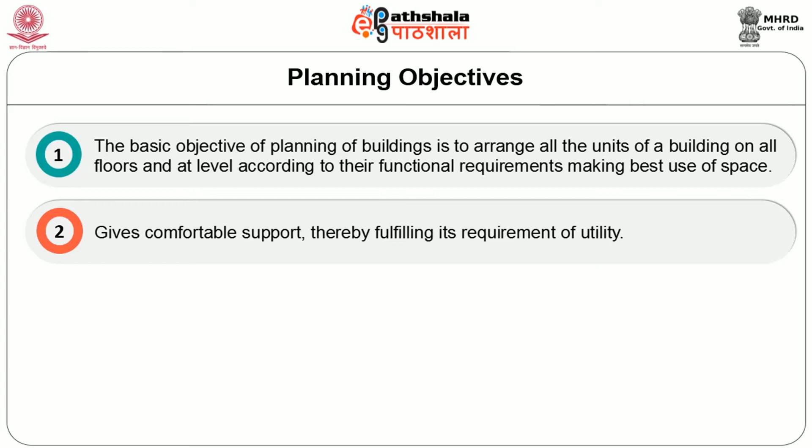The basic objective of planning a building is to arrange all the units of the building on all the floors and at level according to their functional requirement, and make the best use of space. The second one is it gives comfortable support, thereby fulfilling its requirement of utility. The third one is it gives pleasure when seen or touched if it is beautiful. Then the final one is it suits the individual or group if it has character.

Next we will see the factors influencing the life space. In order to understand personality and culture in relation to a particular group of individuals, we generally list a number of factors. Some of them are climate, location, mobility, people, lifestyle, psychology, taste, and financial limit.

The first one is climate. A house can be designed and constructed to maximize or minimize the effect of climate. It is possible to create an atmosphere of warmth or cold, snugness or airiness. The thick rug and the comfortable built-in seating contribute to the sense of snugness. The fireplace too plays a role in keeping the occupants warm. Windows can be oriented to collect warmth or provide ventilation. Floor and wall materials can be selected to store natural solar heat or to insulate against cold.

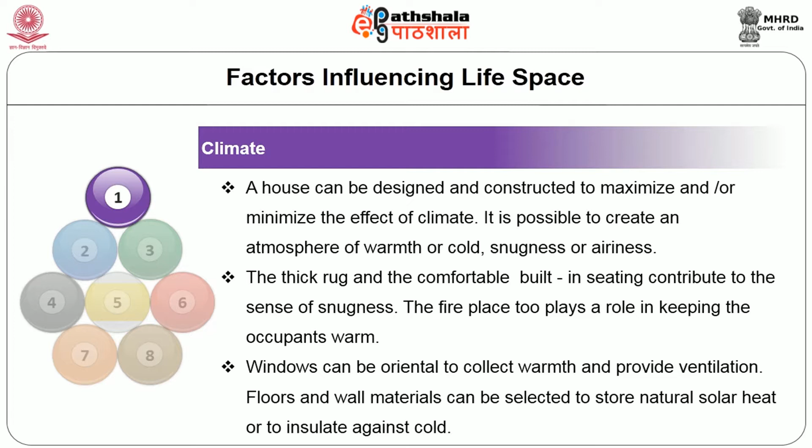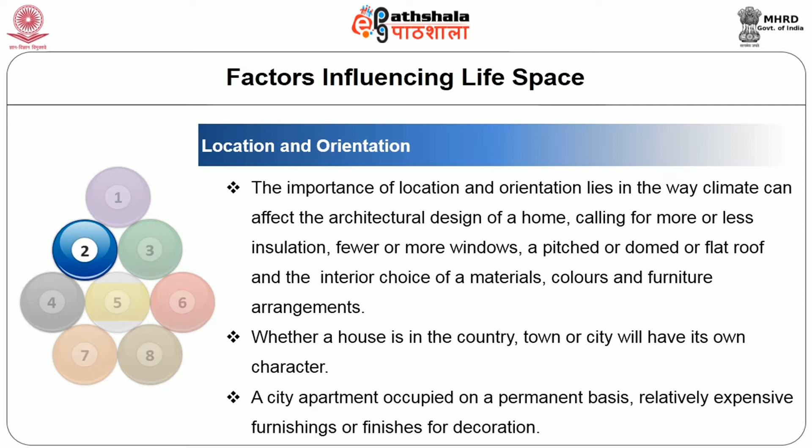Then we will see the second factor, location and orientation. The importance of location and orientation lies in the way climate can affect the architectural design of the home, calling for more or less insulation, fewer or more windows, a pitched, domed or flat roof, and the interior choice of materials, colors and furniture arrangements. Whether the house is in the country, town or city, it will have its own character. A city apartment occupied on a permanent basis has relatively expensive furnishings or finishes for decoration.

The next important factor is mobility. Mobility means movement of the population from one place to another, and it depends upon the nature of work. One may have to transfer in his job every five years. In these cases, they should do careful planning for the house. For example, possess lightweight furniture and repair the worn-out items before leaving for the tenant.

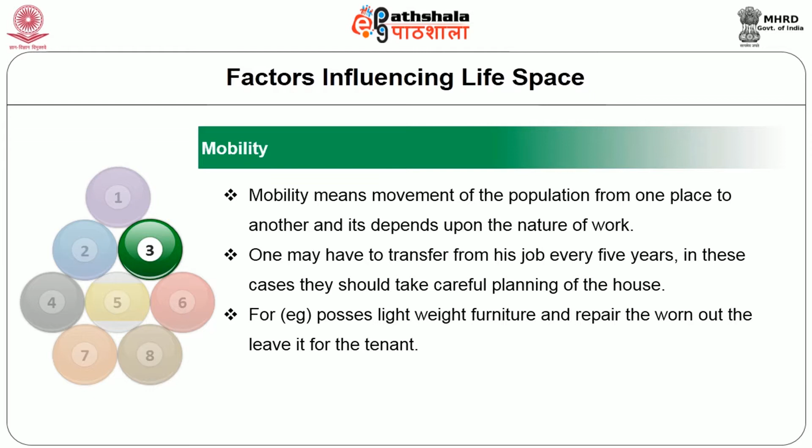Then the next one is people. The people who live in the home are the most important planning factor. The number, ages, sex, size, activities and relationships of the people who comprise the household must be the primary factor, in order to meet the special needs and interests of each individual.

The next factor is lifestyle. Lifestyle is the amount of time devoted to various activities in the home. It includes entertainment habits, large or small, formal or informal gatherings of friends or relatives, types of social activities such as meals, music, games, and the location of these activities within the home. The well-planned space will provide for whichever of these variables dominates the lifestyle.

Then psychology. Psychologist Robert Sommer has studied the effect of the physical environment upon the attitudes and behavior of the people who use it. A space should contribute positively to the comfort and efficiency of the inmates. Often people have the psychological effects of claustrophobia and agoraphobia. People who have the fear of enclosed space have claustrophobia. Claustrophobic people feel great anxiety in small rooms. They always like open spaces.

People who have the fear of open space have agoraphobia. In the absence of walls and other comforting fixtures, the agoraphobic experiences a feeling of insecurity. They always like enclosed space. Such factors need consideration in planning the life space for many people. The next factor is taste. Taste is defined as the particular likes and dislikes of an individual. It is familiar to us from everyday experiences.

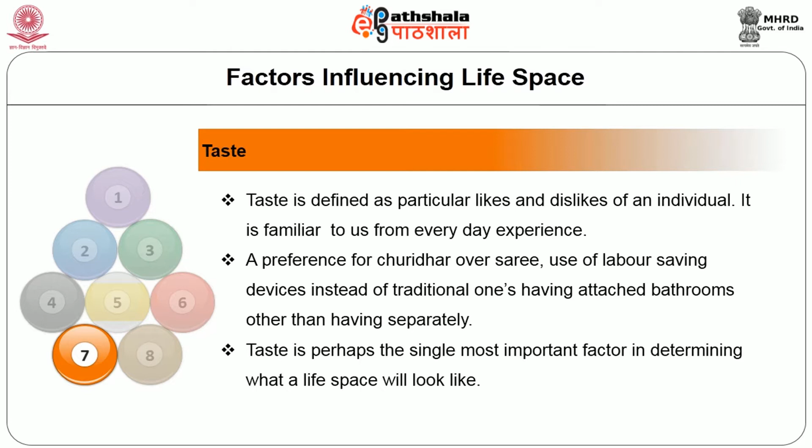A preference for churidar over sari, use of labor-saving devices instead of traditional ones, having attached bathrooms rather than having them separately. Taste is perhaps the single most important factor in determining what your life space will look like. The final factor is financial limits.

Both human and financial resources should be taken into account while planning the house. The present position can help to decide this factor. The individual skills, hobbies and creative abilities should also be taken into consideration. Materials should be selected to provide a balance between care required and aesthetic qualities desired. The next topic is principles of planning the house.

Architects often use the word plan to mean the horizontal representation of area, which is commonly known as floor plan. Such plans usually show walls as thick lines, windows as thin lines, and doors as a blank space. A complete plan should show the direction in which doors swing and also the location of the electrical outlets. As a general rule, the shape of the plan is governed by the climatic condition of the place, whether compact or closed, or extended or open.

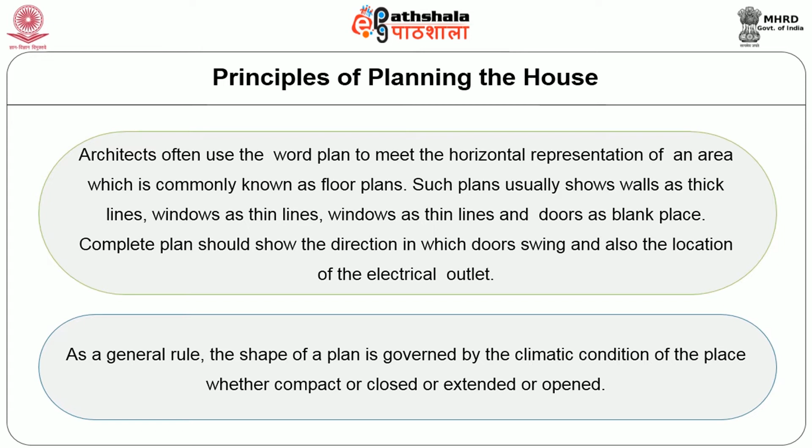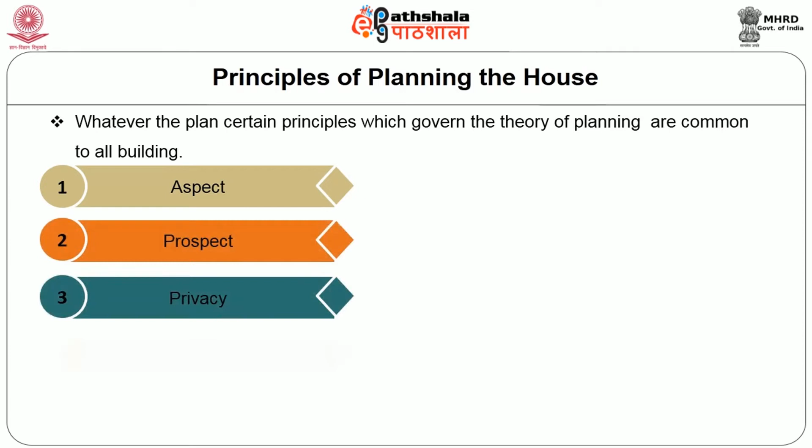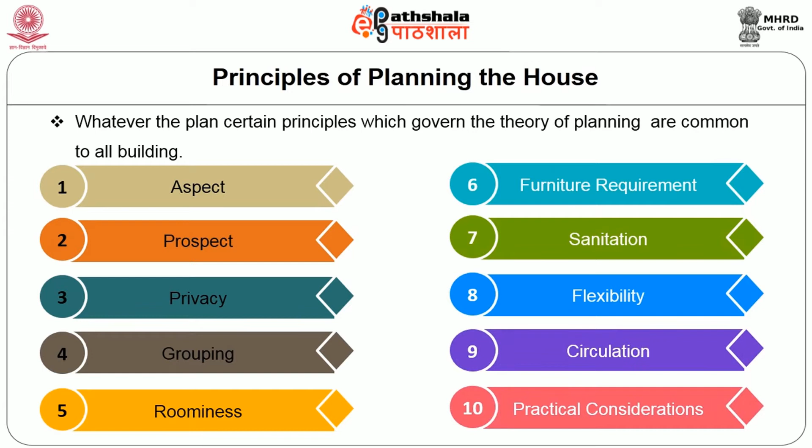Whatever the plan, certain principles which govern the theory of planning are common to all buildings. These principles are aspect, prospect, privacy, grouping, roominess, furniture requirement, sanitation, flexibility, circulation and practical consideration. First we will discuss the principle of aspect.

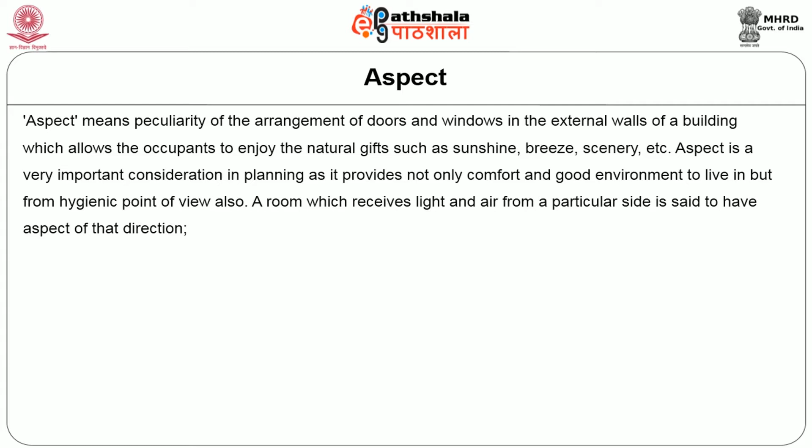Aspect means the peculiarity of the arrangement of doors and windows in the external walls of the building, which allows the occupant to enjoy natural gifts such as sunshine, breeze, scenery, etc. Aspect is a very important consideration in planning, as it provides not only comfort and a good environment to live in, but is important from a hygienic point of view also. A room which receives light and air from a particular side is said to have the aspect of that direction. From this angle, the following aspects for different rooms are preferred.

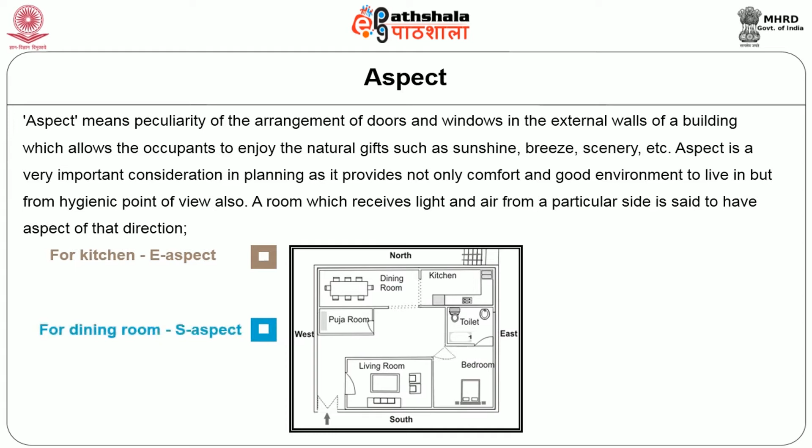For kitchen, east aspect. For dining room, south aspect. For drawing and living room, south aspect or southeast aspect. For bedroom, southwest aspect or west aspect. For veranda, southwest aspect or west aspect. For reading room, stores, classrooms, studios, stairs, etc., north aspect.

It is clear that a kitchen should have an east aspect so that the morning sun would refresh and purify the air and keep the kitchen cool during the remaining period of the day. A dining or drawing and living room should have a south aspect or southeast aspect. The sun is towards the south during winter and more deviated towards the north during summer.

Similarly, the bedroom should have a west aspect or southwest aspect, since the breeze required in summer comes predominantly from the west side only. But a veranda, a gallery or some such sun shading device must be provided on that side so as to protect the structure from the hot afternoon sun. Hence, reading rooms, stores, stairs, studios, classrooms, etc. are placed towards the north.

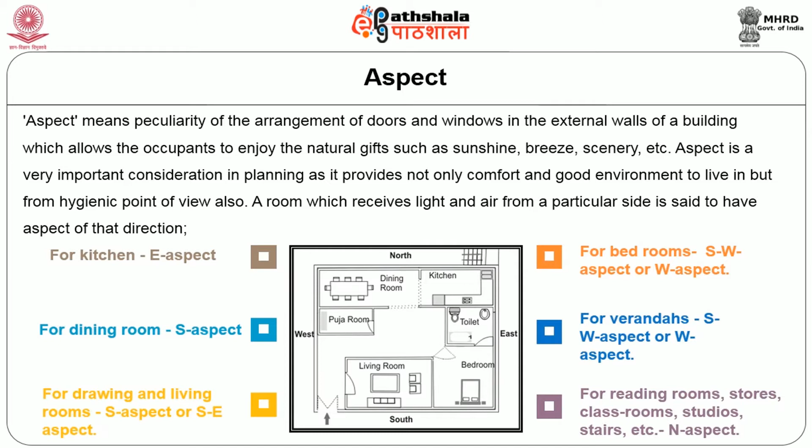The second most important principle of planning the house is prospect. Prospect is the impression that the house is likely to make on a person who looks at it from the outside. Therefore, it includes the attainment of a pleasing appearance by the use of natural beauties, disposition of doors and windows, and concealment of some undesirable views in a given outlook. Prospect and aspect both demand disposition of doors and windows.

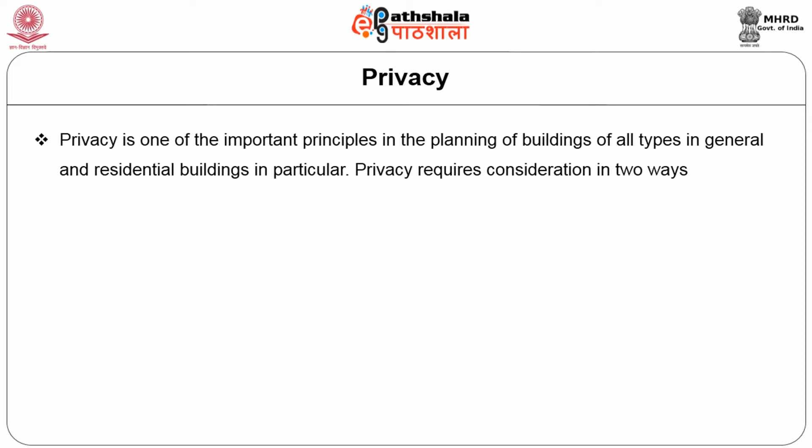The third most important principle of planning the house is privacy. Privacy is one of the most important principles in the planning of buildings of all types in general and residential buildings in particular. Privacy requires consideration in two ways. The first one is privacy of one room from another. The second one is privacy of all parts of the building from neighboring buildings, public streets and byways.

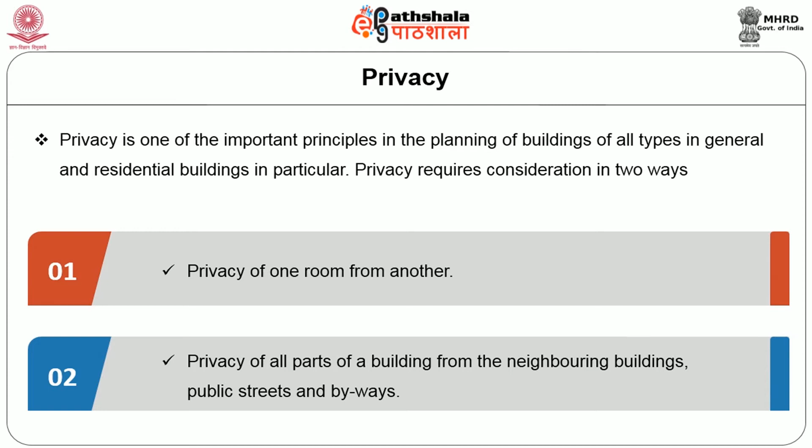Privacy of the former type is attained by carefully planning the building with respect to grouping or disposition of doors or mode of hanging doors, provision of a small corridor or lobby, etc. This can also be achieved by planning screens and curtains. Privacy of the latter type is easily secured by carefully planning the entrance and screening it with trees or creepers trained on a trellis. Privacy is of supreme importance in bedrooms, water closets, urinals, bathrooms, etc. The fourth principle is grouping.

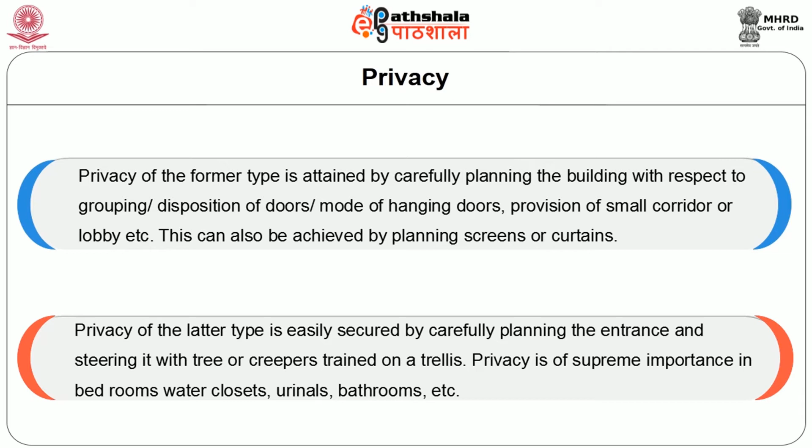Grouping means the disposition of various rooms in related positions so that all the rooms are placed in the proper correlation of their functions and in proximity with each other. For example, in a residential building, the dining room must be close to the kitchen. At the same time, the kitchen should be away from the drawing or the main living room. Otherwise, kitchen smells and smoke would be distracting.

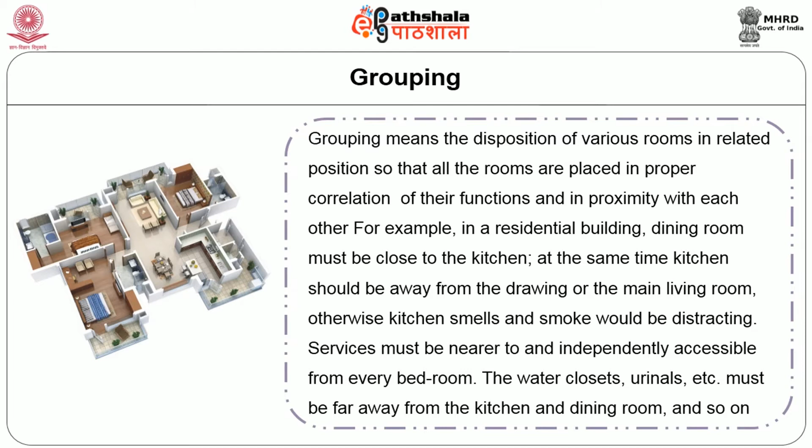Services must be nearer to and independently accessible from every bedroom. The water closet, urinals, etc. must be far away from the kitchen and dining room, and so on.

The fifth principle is roominess. Roominess refers to the effect produced by deriving the maximum benefit from the minimum dimensions of the room. It is the accomplishment of economy of space while at the same time avoiding cramping of the plan. It is essential, particularly in the case of residential buildings where large storage space is required, to make maximum use of every nook and corner of the built-up area of the building before making an addition to the plinth area.

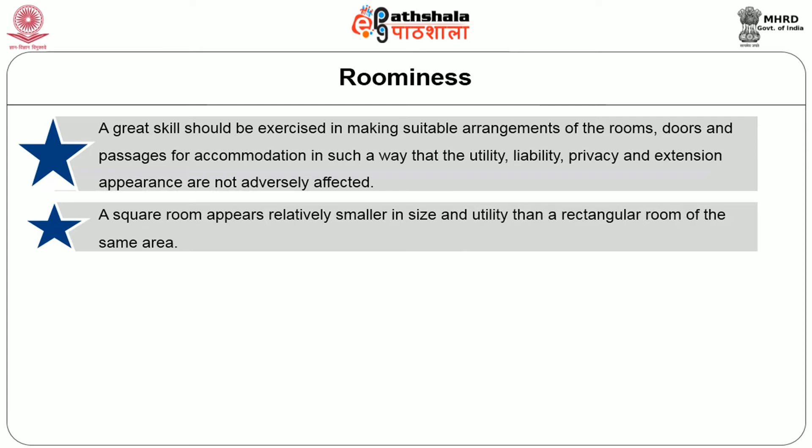For giving a better impression of roominess, the following points should be kept in view. A great skill should be exercised in making suitable arrangements of the rooms, doors and passages for accommodation in such a way that the utility, livability, privacy and external appearance are not adversely affected. A square room appears relatively smaller in size and utility than a rectangular room of the same area. A small room with inordinately high walls appears relatively smaller than its actual size.

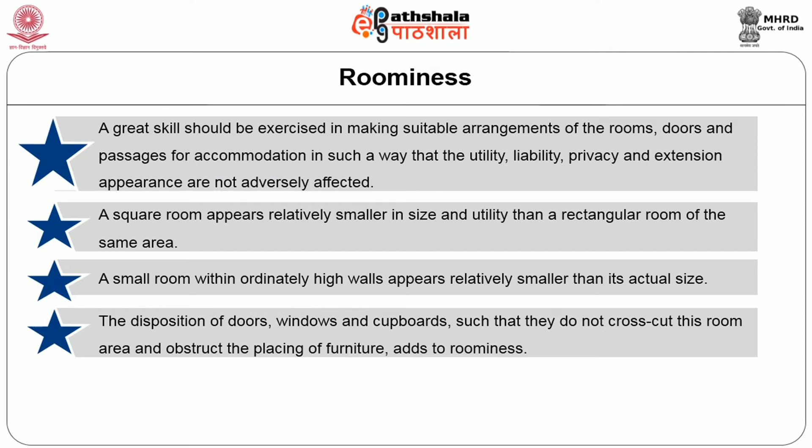The disposition of doors, windows and cupboards such that they do not cross-cut the room area and obstruct the placing of furniture adds to roominess. The design of elements such as floors, walls, ceilings, lift, etc. should be such as to create a sense of space beyond its actual dimensions.

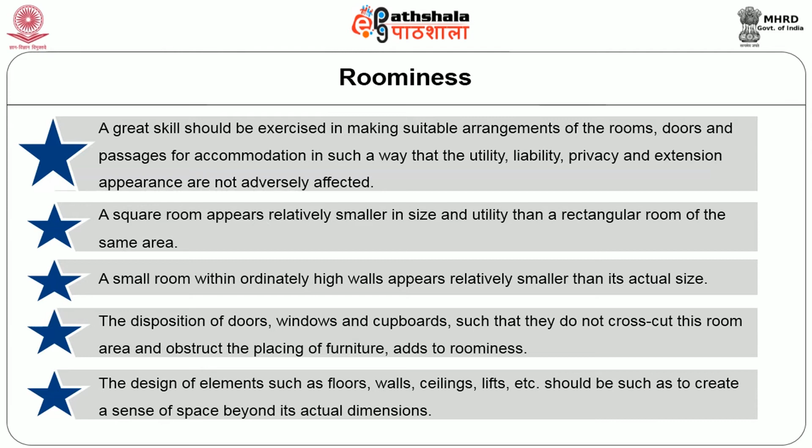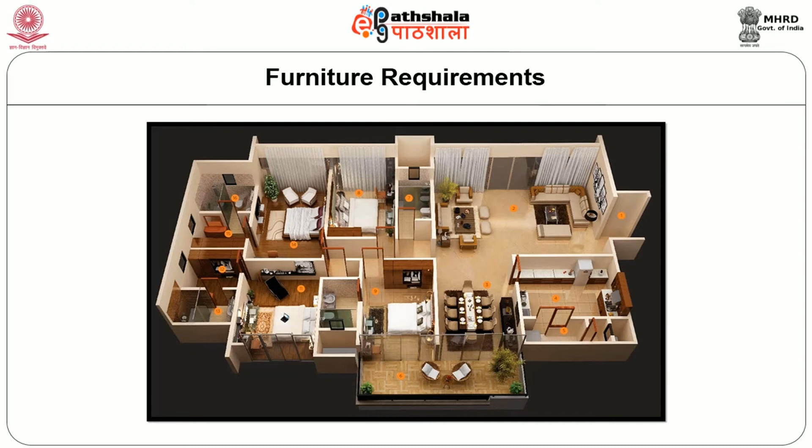The next principle is furniture requirement. The functional requirement of the room or an apartment governs the furniture requirements. This is an important consideration in planning of buildings. In a residential building, for a room, whether intended for a bedroom or kitchen or drawing room, the architect should take into account the position of all types of furniture likely to be accommodated so that the doors, windows and circulation space do not prevent placing of a sufficient number of furniture pieces.

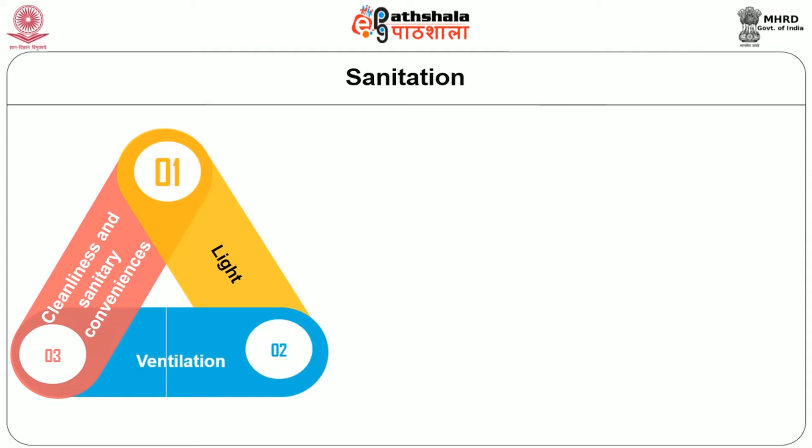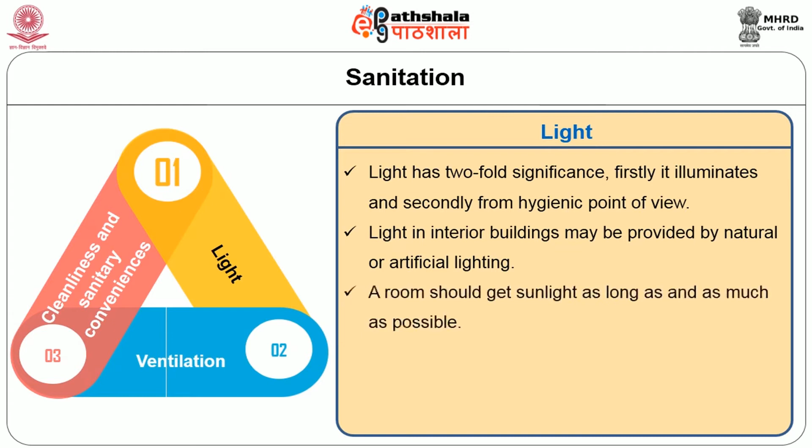Sanitation. Sanitation consists of providing ample light, ventilation, facilities for cleaning and sanitary convenience in the following manner. First is light. Light has twofold significance: firstly, illumination, and secondly, from the hygienic point of view. Light in interior buildings may be provided by natural or artificial lighting. A room should get sunlight as long as and as much as possible. Vertical windows are therefore better than horizontal ones.

Next is ventilation. It is the supply of outside air, either by positive ventilation or by infiltration into the building. Good ventilation is an important factor conducive to comfort in buildings. Poor ventilation or lack of fresh air in a building always produces headache, sleepiness, inability to fix attention, etc. Ventilation may be natural or mechanical. In natural ventilation, the outside air is supplied into the building through windows, ventilators and other openings.

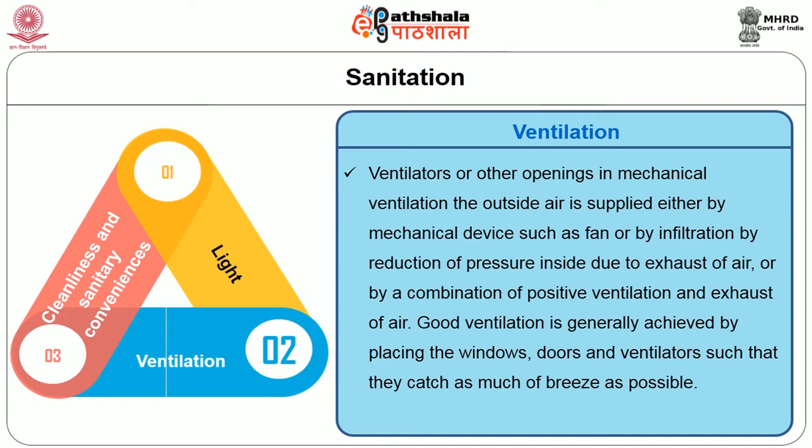In mechanical ventilation, the outside air is supplied either by mechanical devices such as fans, or by infiltration by reduction of pressure inside due to exhaust of air, or by a combination of positive ventilation and exhaust of air. Good ventilation is generally achieved by placing the windows, doors and ventilators such that they catch as much of the breeze as possible.

Cleanliness and sanitary convenience. Though the general cleaning and upkeep of the building is the responsibility of the occupants, even then some provisions to facilitate cleaning and prevention of dust are necessary in planning. The floors as far as possible should have a non-absorbent, smooth surface, and proper slope should be given to facilitate washing, with suitable outlets in the walls.

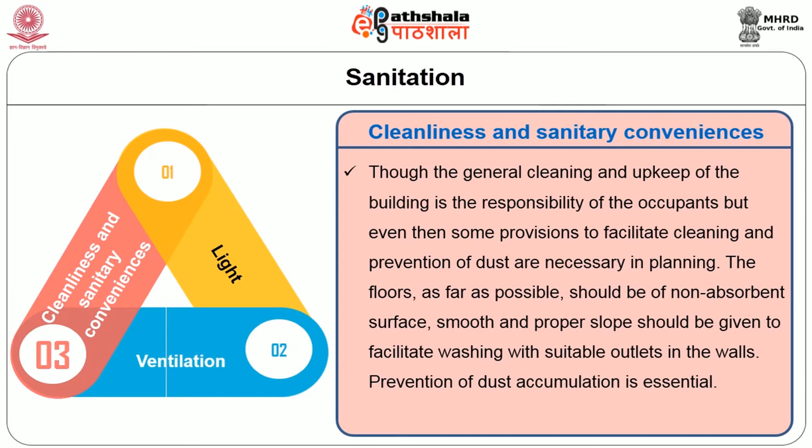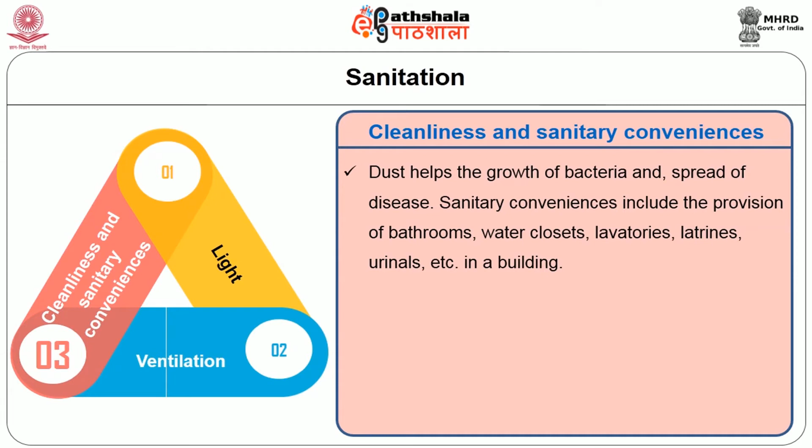Prevention of dust accumulation is essential. Dust helps the growth of bacteria and spread of diseases. Sanitary conveniences include provision of bathrooms, water closets, lavatories, latrines, urinals, etc. in the building.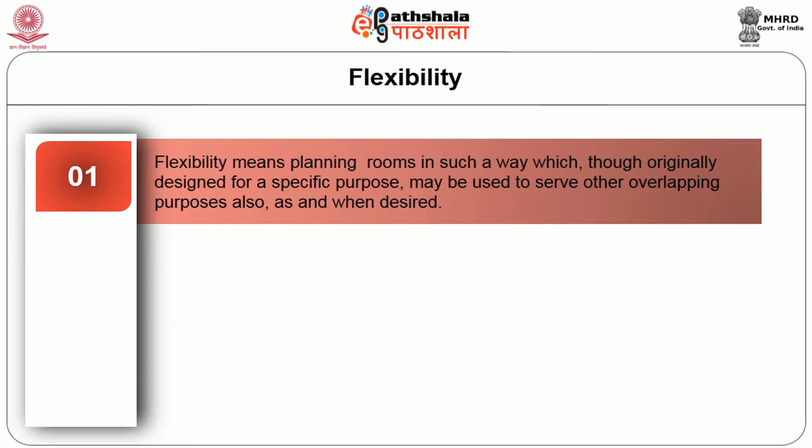The next is flexibility. Flexibility means planning rooms in such a way that, though originally designed for a specific purpose, they may be used to serve other overlapping purposes also as and when desired. This is particularly important for designing houses for middle class families. A house planned on scientific principles within a small space must provide for various activities such as listening to the radio, children's homework, entertaining guests, and festive occasions such as holiday dinners, birthday parties, wedding banquets, and so on.

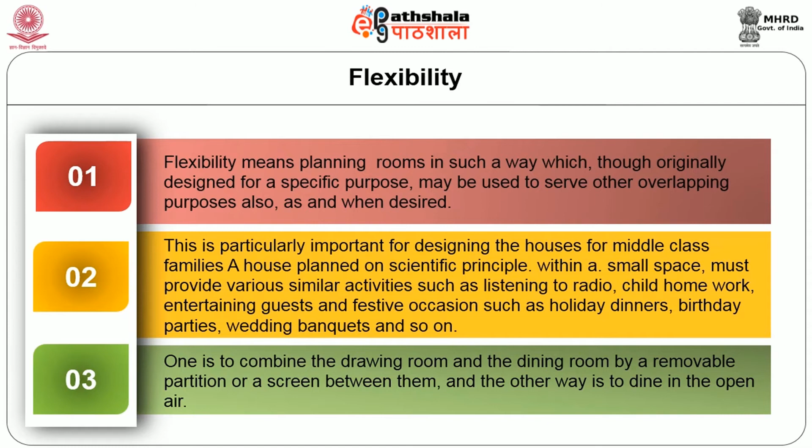One way is to combine the drawing room and the dining room by a removable partition or a screen between them, and the other way is to dine in the open air. Next principle is circulation.

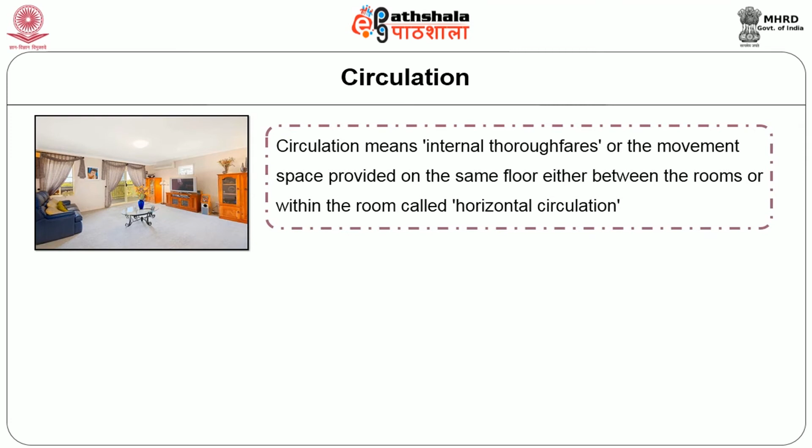Circulation means internal thoroughfares or the movement space provided on the same floor, either between the rooms or within the rooms, called horizontal circulation, and between the different floors through stairs or lifts, called the vertical circulation. Passages or corridors, halls and lobbies serve the purpose of horizontal circulation, whereas for vertical circulation normally stairs or staircase, electrical lift, ramps, etc. are the means of access to different floors.

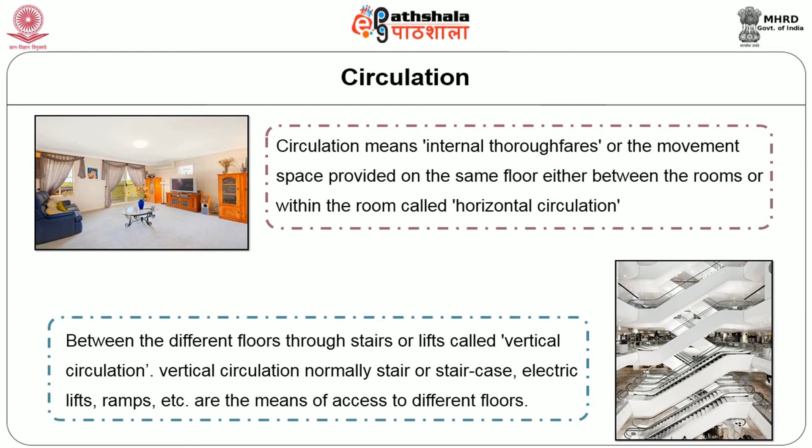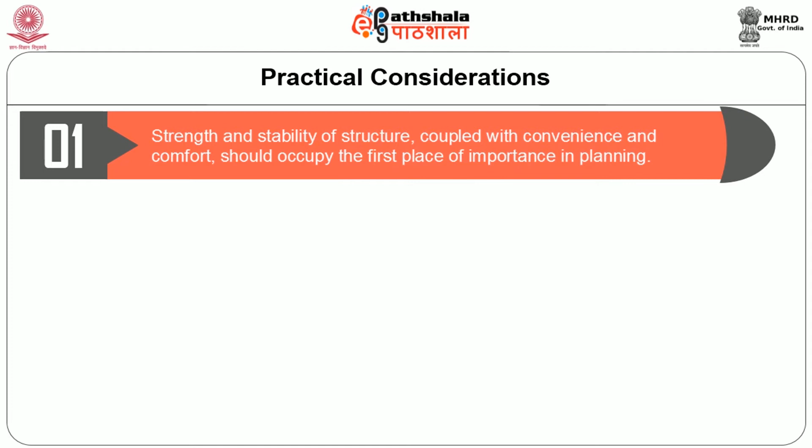Then the final principle is practical consideration. The following practical considerations should be given due consideration in the planning of a building. The first one is strength and stability of the structure coupled with convenience and comfort should occupy the first place of importance in planning. The second is simplicity and effect of strength lend a lasting beauty and nobility to the building. The third one is it should be remembered that a building or a house is immovable property and

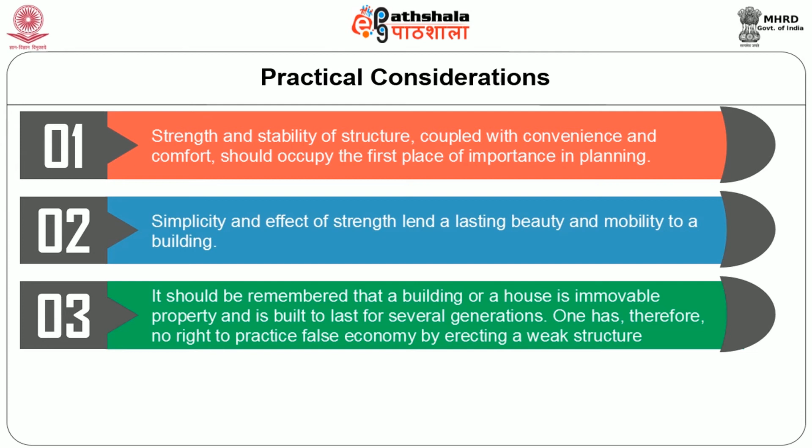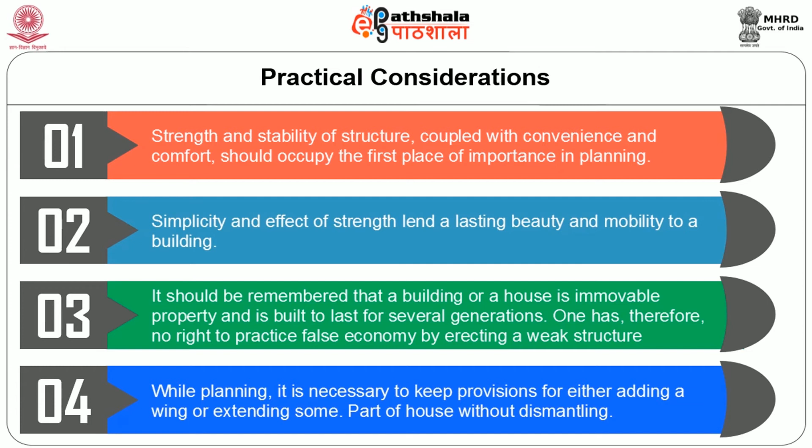is built to last for several generations. One has therefore no right to practice false economy by erecting a weak structure. And the final one is while planning it is necessary to keep provision for either adding a wing or extending some part of the house without dismantling.

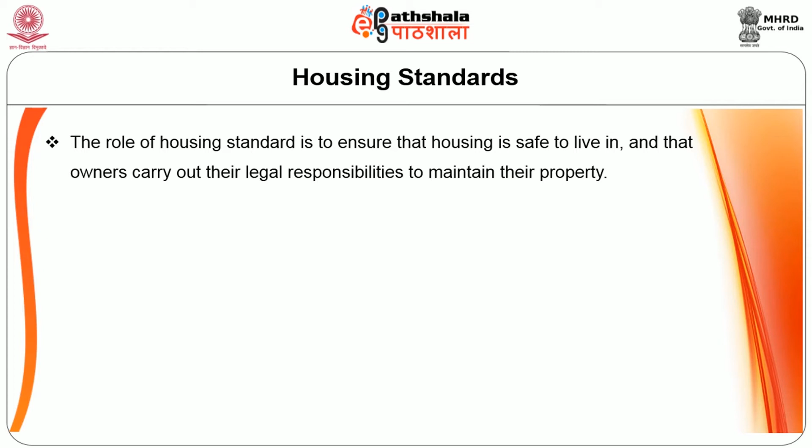So next we will discuss the housing standards. The role of housing standards is to ensure that housing is safe to live in and that owners carry out their legal responsibilities to maintain their property. The Bureau of Indian Standards is the national standard body of India established by the Bureau of Indian Standards Act 1976, formerly known as ISI.

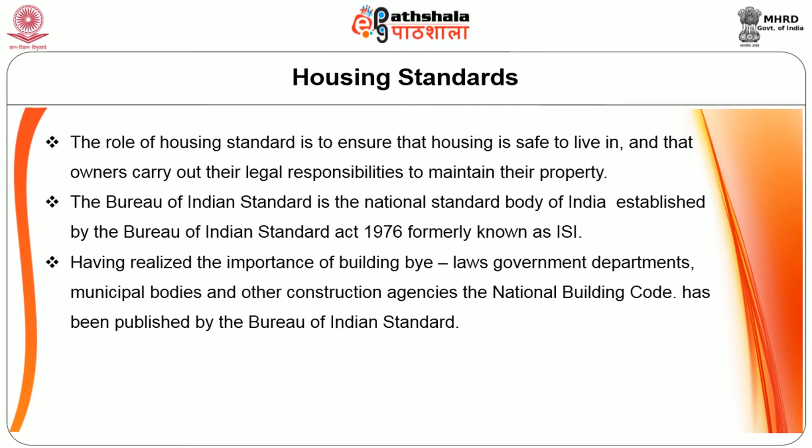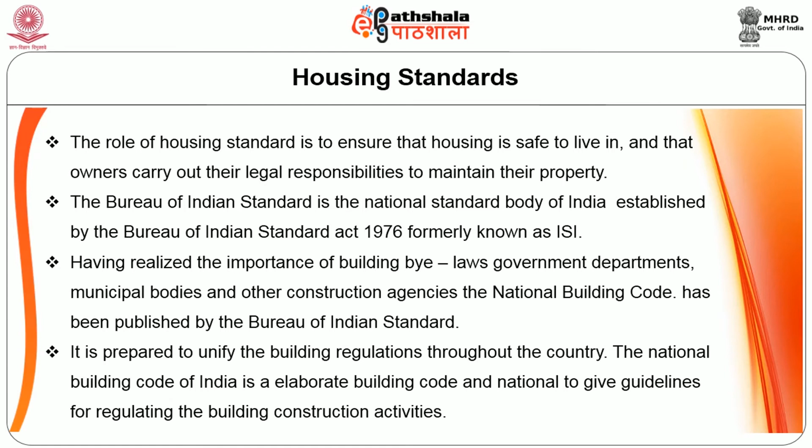Having realized the importance of building bylaws for government departments, municipal bodies and other construction agencies, the National Building Code has been published by the Bureau of Indian Standards. It is prepared to unify the building regulations throughout the country. The National Building Code of India is an elaborate building code and a national document to give guidelines for regulating the building construction activities.

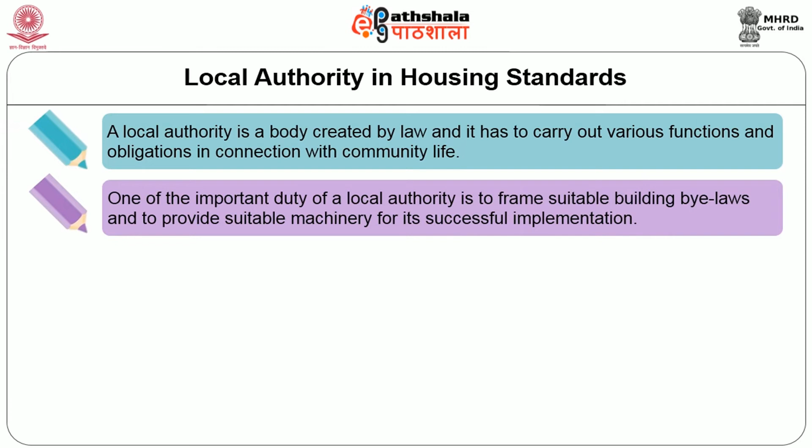Local authority in housing standards. A local authority is the body created by law and it has to carry out various functions and obligations in connection with community life. One of the important duties of the local authority is to frame suitable building bylaws and to provide suitable machinery for its successful implementation. For this purpose, it should form a department to receive the plans of proposed buildings.

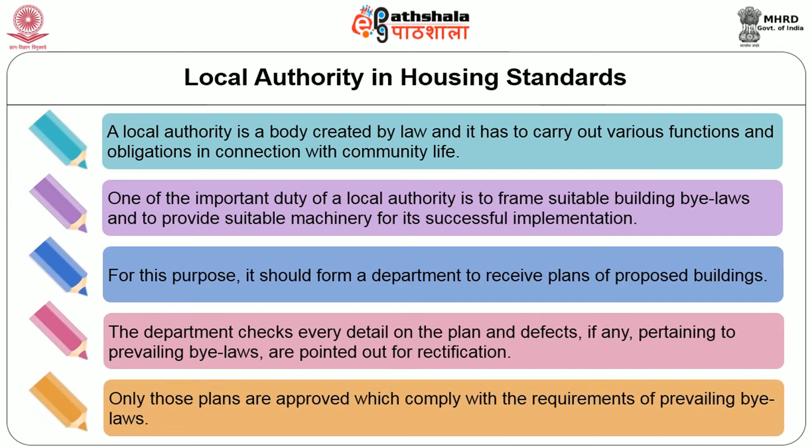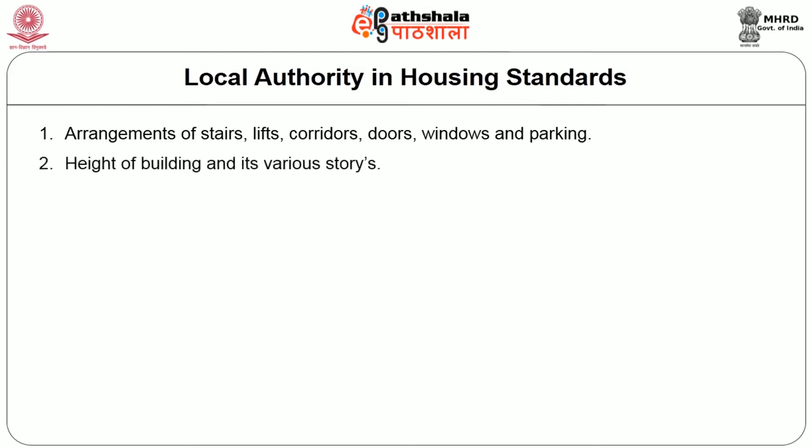The department checks every detail on the plan and defects, if any, pertaining to the prevailing bylaws are pointed out for rectification. Only those plans are approved which comply with the requirements of prevailing bylaws. The approval of a plan means the acceptance by the local authority of the following requirements only. First one is arrangement of stairs, lift, corridors, doors, windows and parking. Height of building and its various stories.

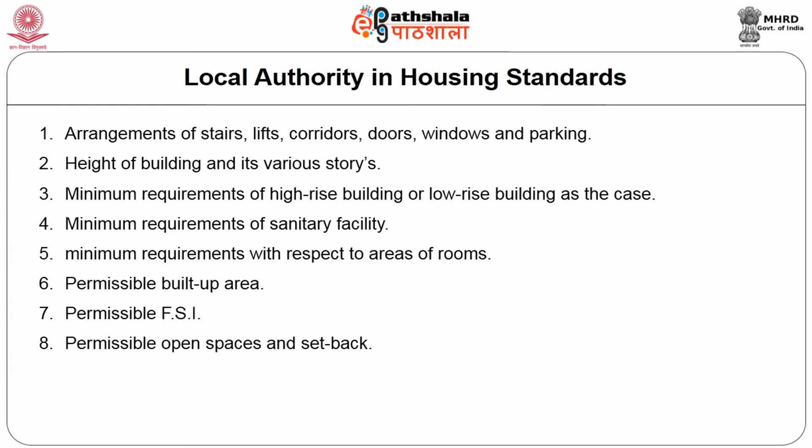Then minimum requirements of high-rise building or low-rise building as the case may be. Minimum requirements of sanitary facilities. Then minimum requirements with respect to area of rooms. Permissible built-up area, permissible FSI, permissible open space and setback, permissible use of building and provision for light and ventilation.

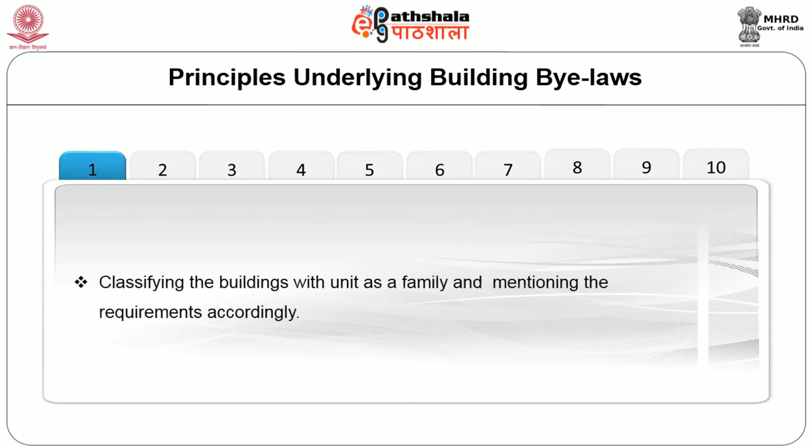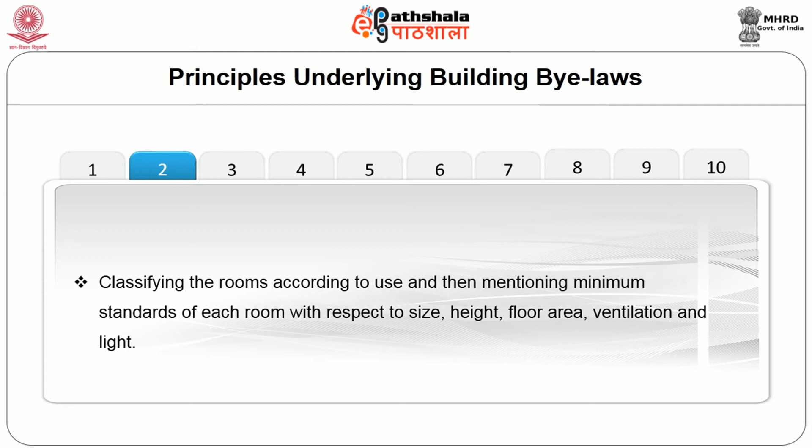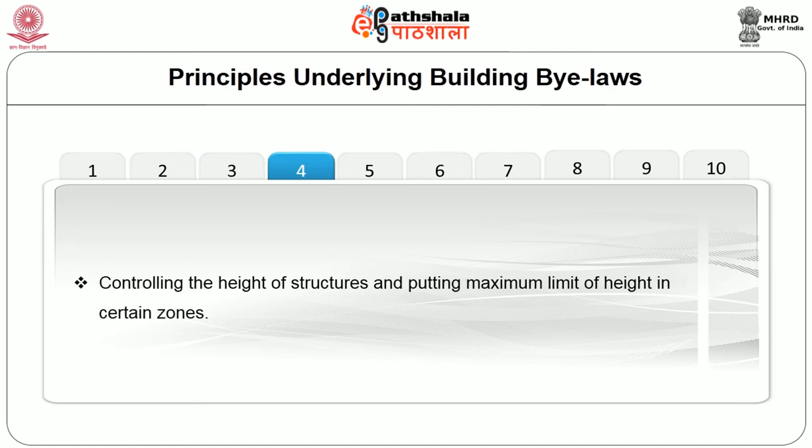Principles underlying building bylaws. The broad principles to be observed while framing the building bylaws for any locality can be summarized as follows. Classify the buildings with the unit as the family and mention the requirements accordingly. Classify the rooms according to use and then mention the minimum standard of each room with respect to size, height, floor area, ventilation and light. Controlling the height of compound wall and location of compound gates. Controlling the height of structure and putting a maximum limit of height in certain zones.

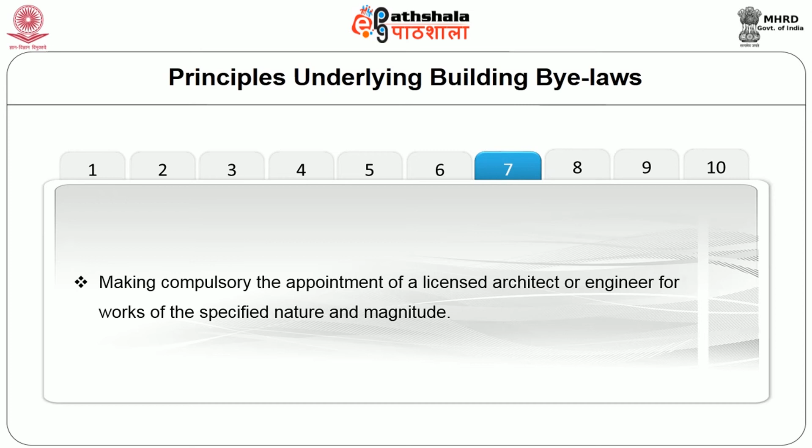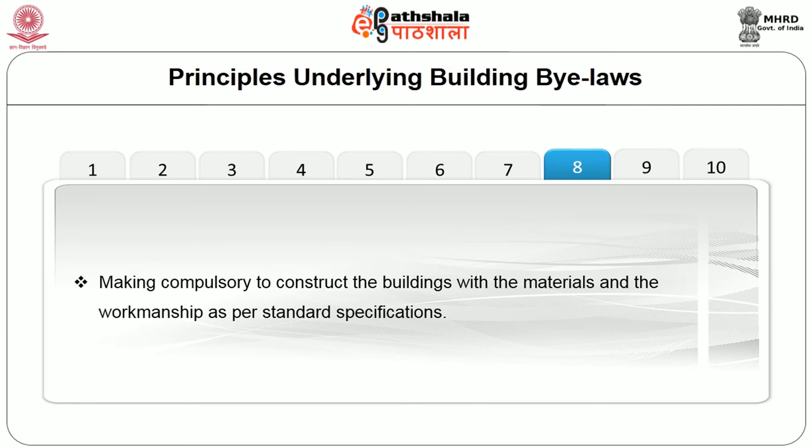Controlling the area of projections in the marginal space, insisting on suitable FSI. Insisting upon suitable arrangements with respect to drainage and water supply. Making compulsory the appointment of licensed architects or engineers for work of the specified nature and magnitude. Making it compulsory to construct the buildings with the materials and workmanship as per standard specifications. Mentioning the light planes, setbacks and marginal spaces. Mentioning the minimum size of plots, their dimensions and frontage, etc.

Building bylaws for residential areas. The brief descriptions of all the possible building bylaws to be framed for residential areas of a typical town planning scheme are mentioned below. The content and provisions may be altered to suit the local requirements. Following are the important building bylaws.

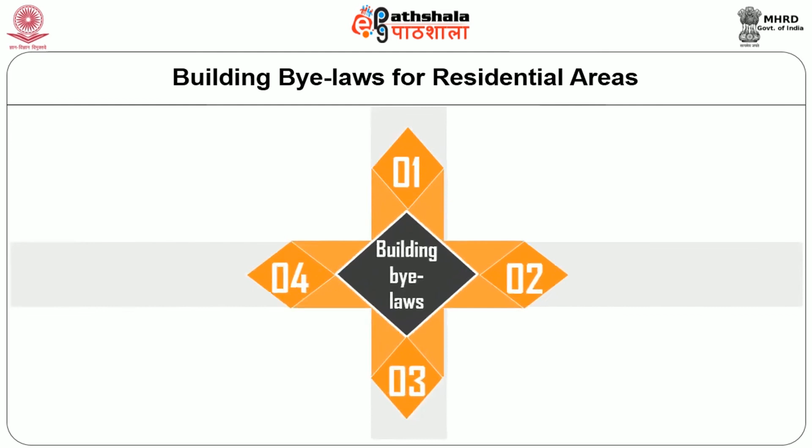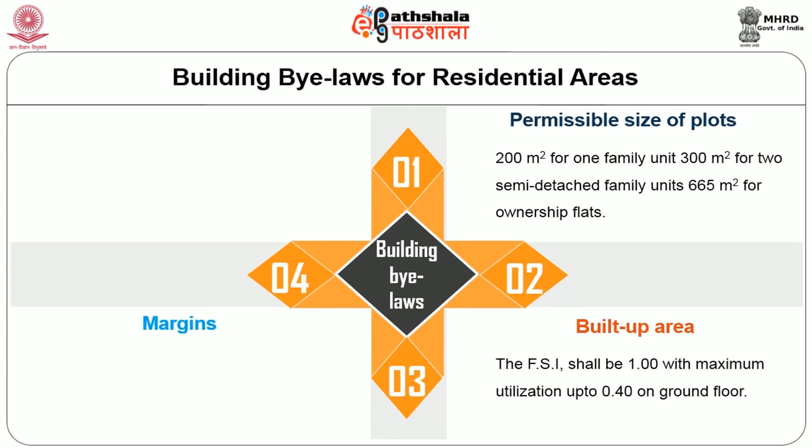Permissible size of plots: 200 meters squared for one family unit, 300 meters squared for two semi-detached family units, 665 meters squared for ownership flats. Built-up area: the FSI shall be 1, with maximum up to 0.4 on ground floor. Margins: the margins on roadside and adjacent properties shall be respectively 4.5 meter and 3 meter. For plots having areas less than 300 meters squared, they shall be respectively 3 meter and 2 meter.

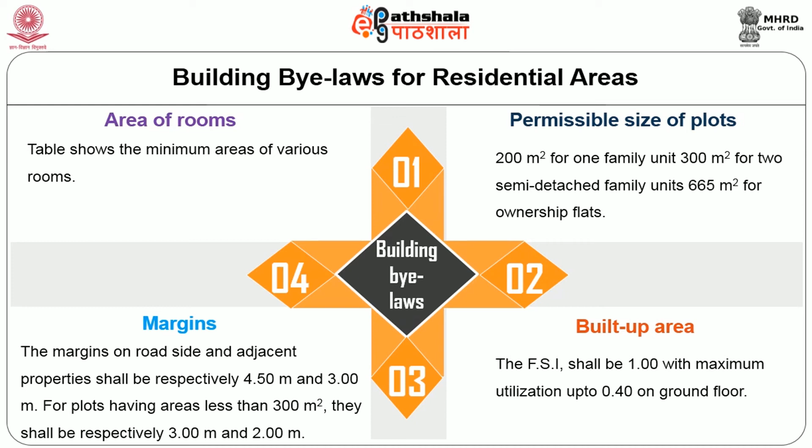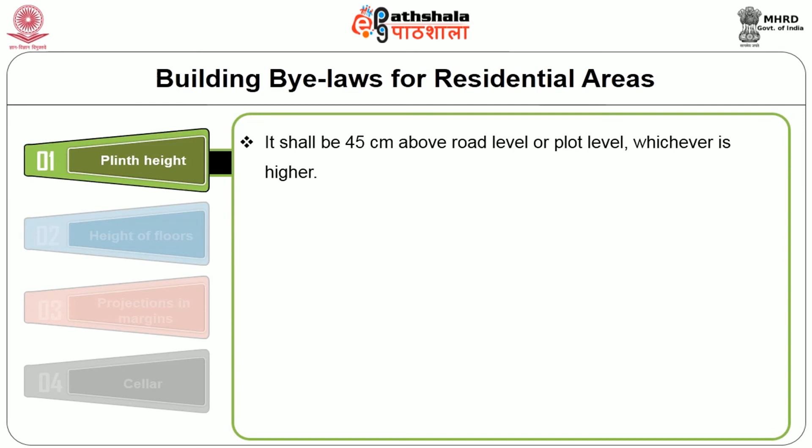Then plinth height. It shall be 45 centimeter above the road level or plot level, whichever is higher. Then height of floors. The minimum height shall be as follows: 2.1 meter for bathroom, water closet, pump room, cold room and water room; 2.7 meter floor height on each floor. The maximum height of floor shall not be more than 1.25 times the minimum height.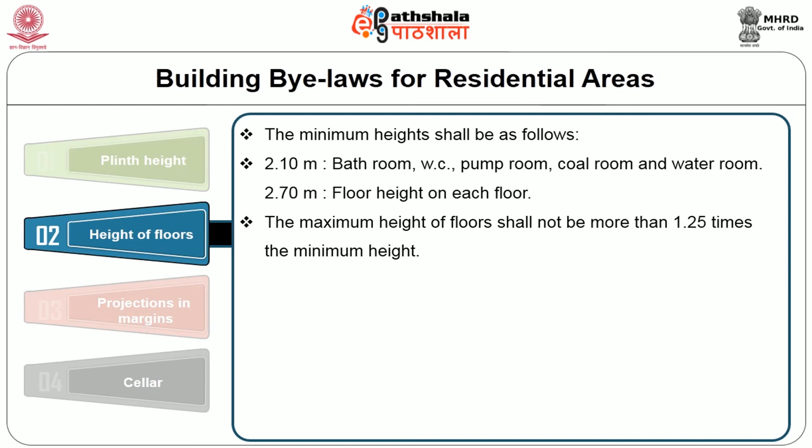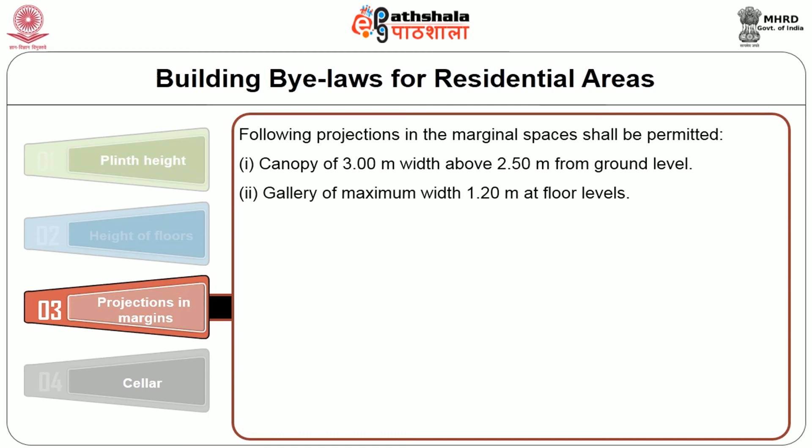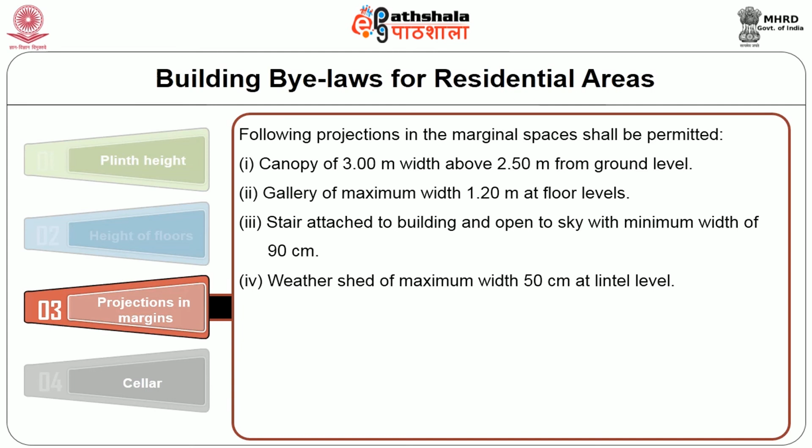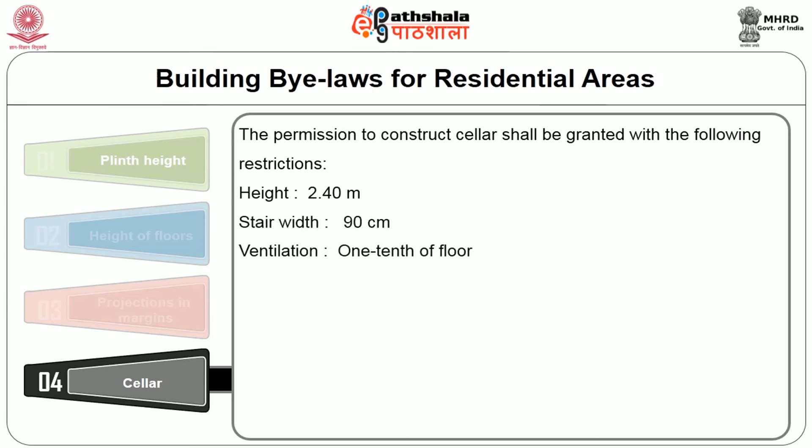Then projection in margins. The following projections in the marginal space shall be permitted: canopy of 3 meter width above 2.5 meter from ground level, gallery of maximum width 1.2 meter at floor levels, stairs attached to building and open to sky with minimum width of 90 centimeter, weather shed of maximum width 50 centimeter at lintel level. Cellar. The permission to construct a cellar shall be granted with the following restrictions: height is 2.4 meter, stair width is 90 centimeter, ventilation 1/10 of the floor.

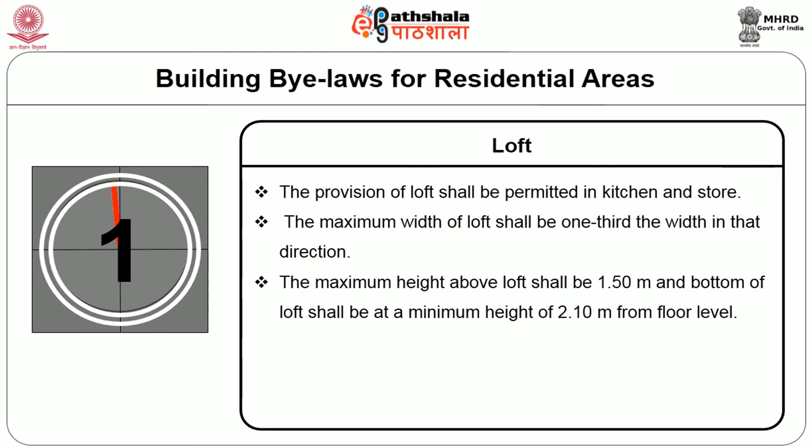Then loft. The provision of the loft shall be permitted in kitchen and storeroom. The maximum width of the loft shall be 1/3 the width in the directions. The maximum height above the loft shall be 1.5 meter and the bottom of loft shall be at a minimum height of 2.1 meter from floor level. Lift. For buildings having more than 3 floors, the lift shall be provided at the rate of 1 lift for 20 family units. The lift shall be provided from ground floor and its minimum capacity shall be 6 persons. If the height of the building is 25 meter or more, at least 2 lifts shall be provided.

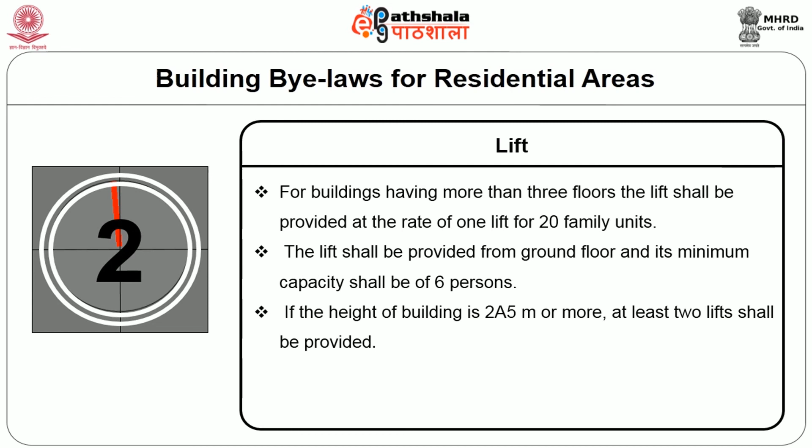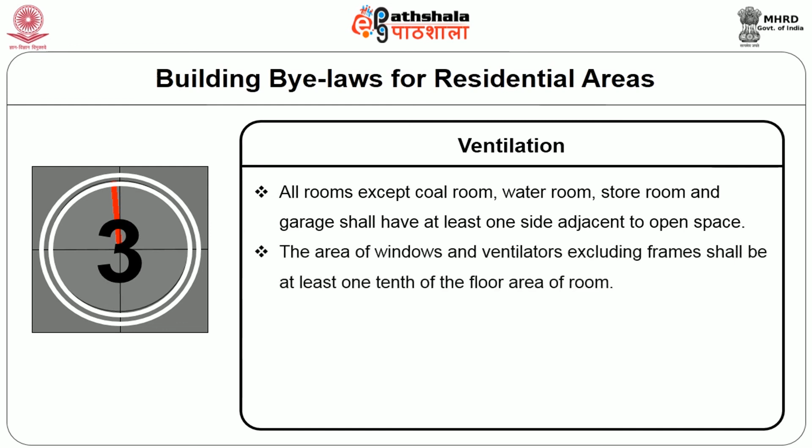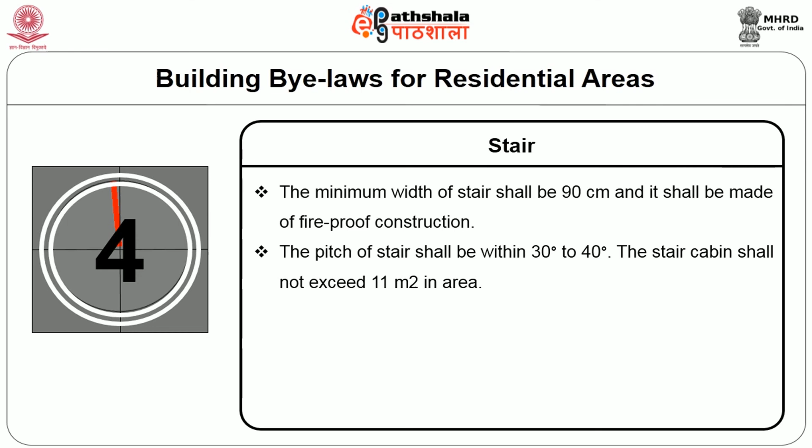Ventilation. All rooms except coal room, water room, store room and garage shall have at least one side adjacent to open spaces. The area of windows and ventilators excluding frames shall be at least 1/10 of the floor area of the room. Stair. The minimum width of the stair shall be 90 centimeter and it shall be of fireproof construction. The pitch of stair shall be within 30° to 40° angle. The stair cabins shall not exceed 11 meters squared in area. Minimum requirements. One family unit shall be provided with a minimum of 1 living room, 1 kitchen, 1 bathroom and 1 water closet.

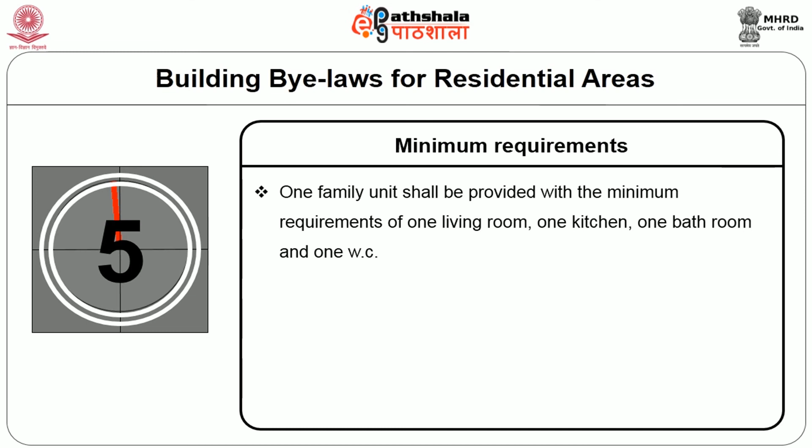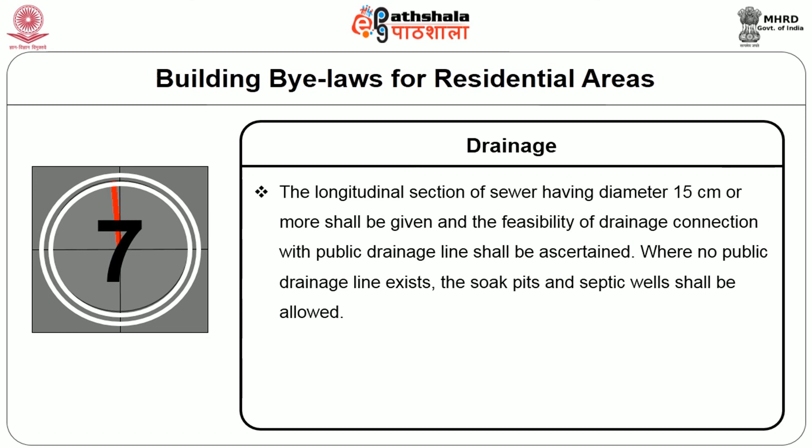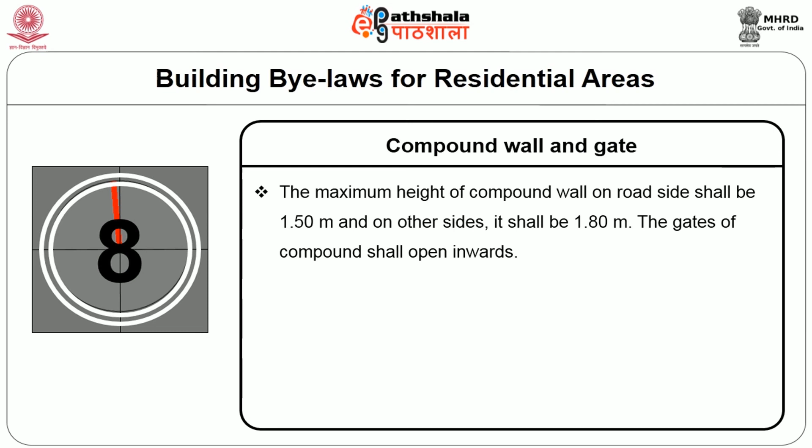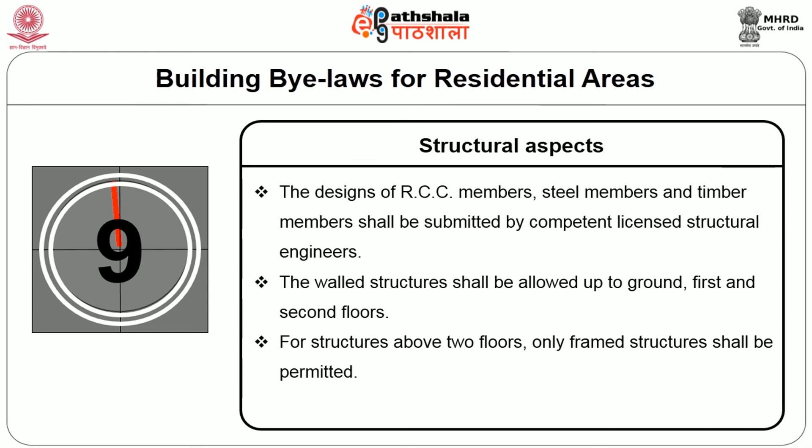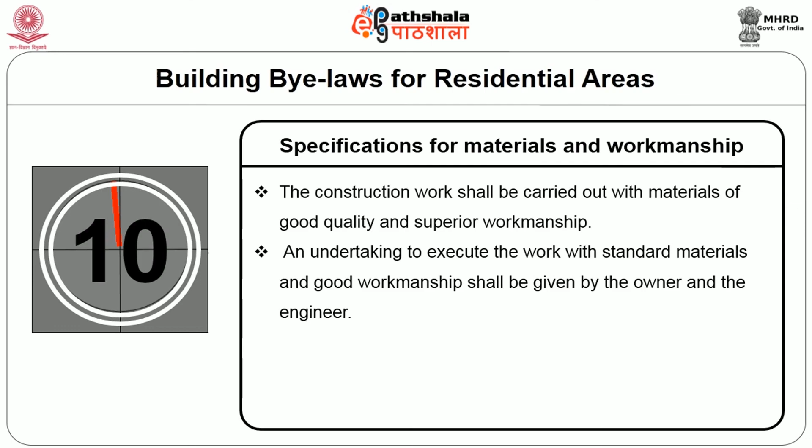Structural aspects. The design of RCC members, steel members and timber members shall be submitted by competent licensed structural engineers. Walled structures shall be allowed up to ground, first and second floors. For structures above 2 floors, only framed structures shall be permitted. Specifications for materials and workmanship. The construction work shall be carried out with materials of good quality and superior workmanship. An undertaking to execute the work with standard materials and good workmanship shall be given by the owner and the engineer. Then we will see the conclusion.

The provision of good housing is to be accomplished by various means and measures. It is not enough to provide structurally stable structures as houses, but they must be so located and designed that they afford convenience, amenity, health, and social life of the community. So before planning the house, one should keep in mind the important aspects of principles, factors, and accordance with the housing standards for better living.